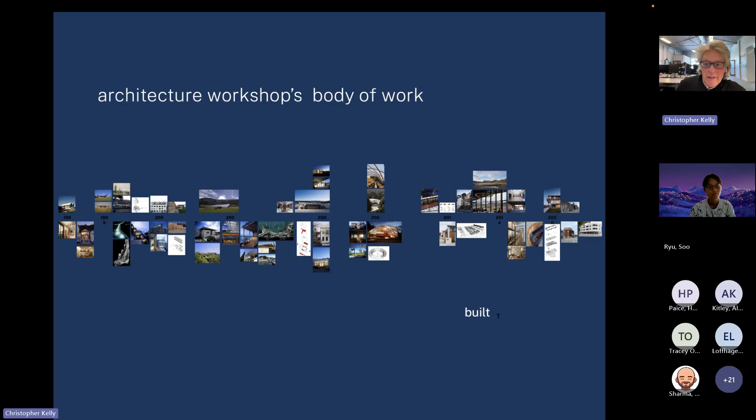I wanted to start by explaining some architecture workshop background. Here is our built and unbuilt work over the last 30 years, a timeline that we make. You don't get to build everything. If you get to build half of what you design, it's pretty exciting.

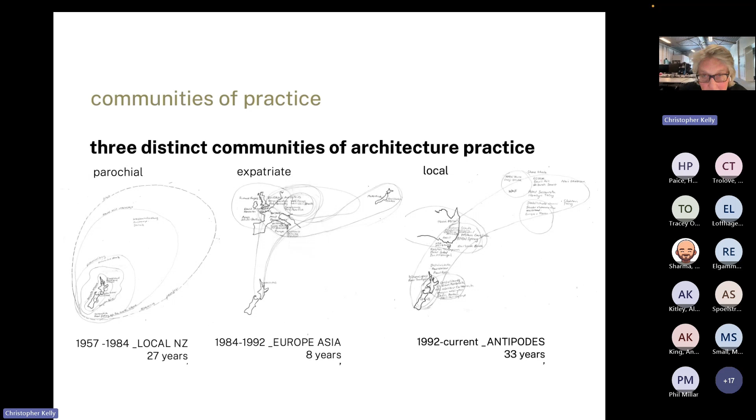I'm doing a PhD here in Melbourne, and part of that asks you to talk about your communities of practice. Up until '84, I was based only in New Zealand, so we were always looking out from New Zealand. Then I worked away for 8 years and had quite a different community of practice, with architects and landscape people all over the place. Then coming back to New Zealand in '92 to start architecture workshop, your community of practice expands. So I think it's good to think about what your own influences are and where you come from.

I was born on a farm on the East Coast, which you'll see.

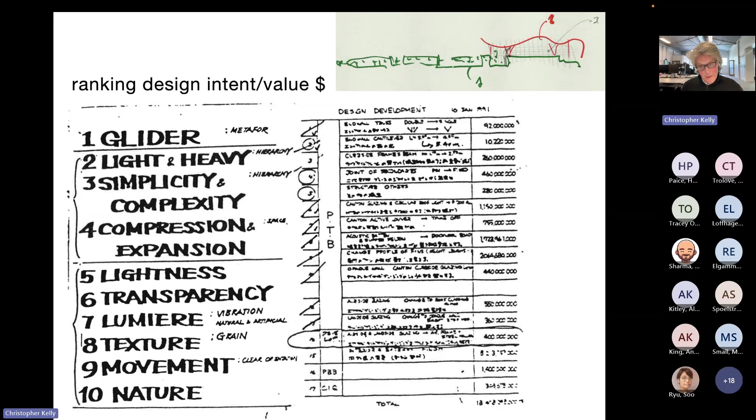When I was away, one of the most important things I learned was about ranking design intent, thinking about what the design intent was that we're making, and then using that to manage your budget by putting a hierarchy in your design intent. This is a project I worked on for a couple of years, and this is a little sketch by Renzo Piano - 1 is the ground, 2 is the roof, and 3 is the space between the roof and the ground. We were able to talk about the budget, and once we started losing budgetary items above item number 5, we were losing the design intent of the project, but we could address some issues below that. So you have to bit by bit try and distill what's important in your project.

You sort of use other people's ideas until you get your own ideas going. But I think that's fine - you just have to reference them and note them.

I think there's a thing in New Zealand that you become very aware of - the cultural cringe, and the idea that European culture here is quite fragile. It's Michael King. And then there's this cognitive bias, where everybody in New Zealand's got a lot of reckons, and you're never really asked to account for those. So I think it's quite important to acknowledge that, and acknowledge how you think about things now.

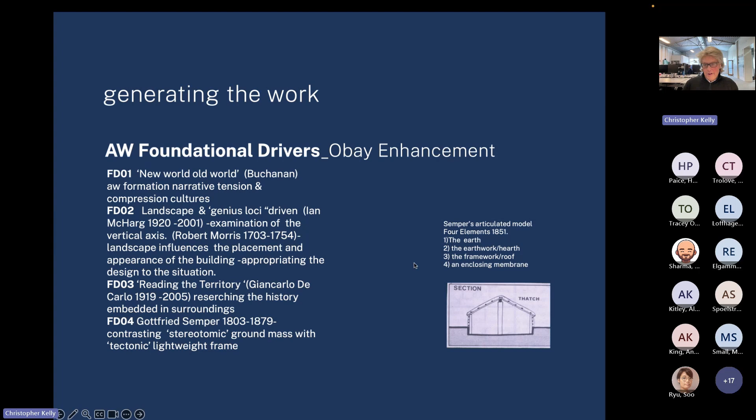That resonated with a German man called Semper, who had already thought a lot about the earth, the earthwork hearth, and the framework. We used those ideas to drive our projects when we first started.

There's general ones, which are readings brought back from overseas, and then local ones, which change every time you look carefully at the local project. I think there's just a list here which I made for myself, but as we go through I'll try to explain a few more of these.

I think that idea of land and how you engage with the surface is quite important. You lift the land up and you've got something like the Sydney Opera House base, a platform - it's flat, it's on grade. Or you dig in, more of a trench, or you can be completely buried. So there are only four conditions, and we always test our projects against those when we're starting.

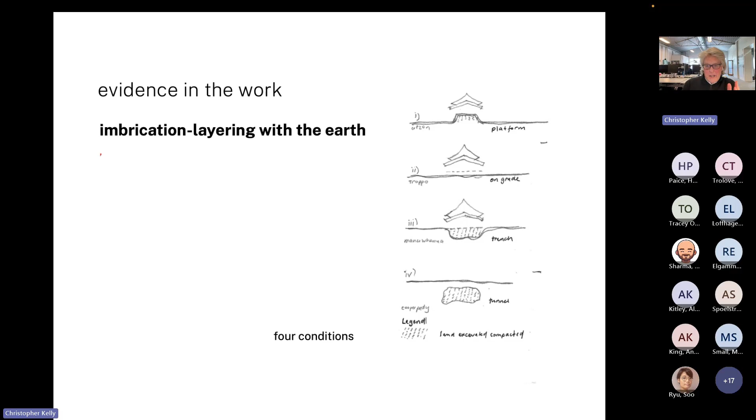We're always interested in the layering with the earth. So if you look at New Zealand as the world's 8th largest continent...

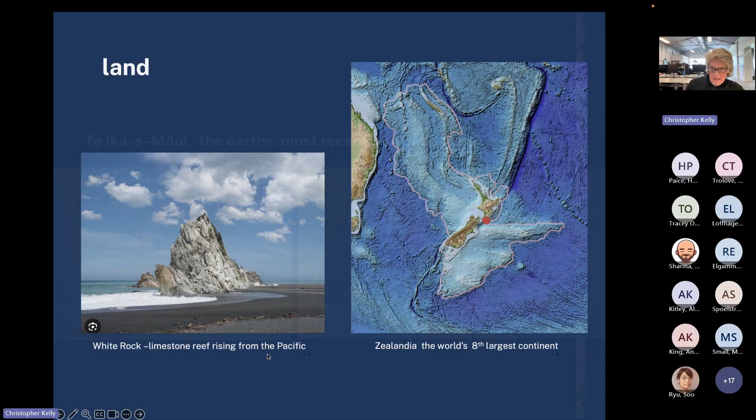It's a recent discovery, from bore logs by the JOIDES Resolution, a ship that made bores in those star positions. They found that the continent is about 1 or 2 kilometers below the sea, and that one side is completely geologically different from the other side.

The North Island is the world's most recently formed land - only 90 million years old - while the South Island is 180 million years old. So the legend of Māui is actually based on fact.

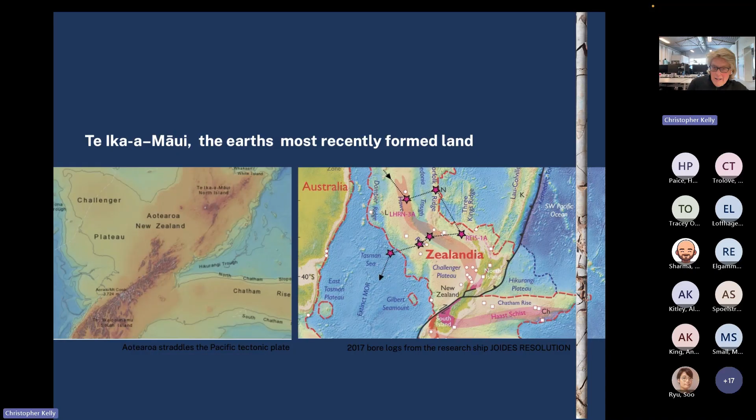I think it's very interesting to wonder how observant the first peoples in New Zealand must have been to have realised that.

Starting to look at our site, Te Whanganui-a-Tara, the view from the south and the view from the north, we always think back to this guy called Robert Morris in the 18th century. He always thought architecture and landscape were the same thing. We agree with him about that, and he pushed it a bit further.

He thought the site was an external source for architectural order, and that the architecture should be subservient to the landscape. I think we also agree with that.

When Wellington was settled, it was first settled on the north end of the harbour by the Lower Hutt, Petone, and there was a huge southerly. They decided that was not the ideal place for a city, so they abandoned all the sites they'd already sold in London.

This is the Wakefield Settlement Company, and they laid out the city at the other sheltered end of the site, the amphitheatre end. Because there wasn't enough space for much public squares and those sorts of things - remember they'd already sold all these sections and people were arriving wanting to find where their section was - the ridgelines became parkland.

There's very interesting and specific things about Wellington that have only developed where Wellington is. We're fascinated by those sorts of things, and we're quite interested in this Giancarlo person who talks about understanding the heritage and the history.

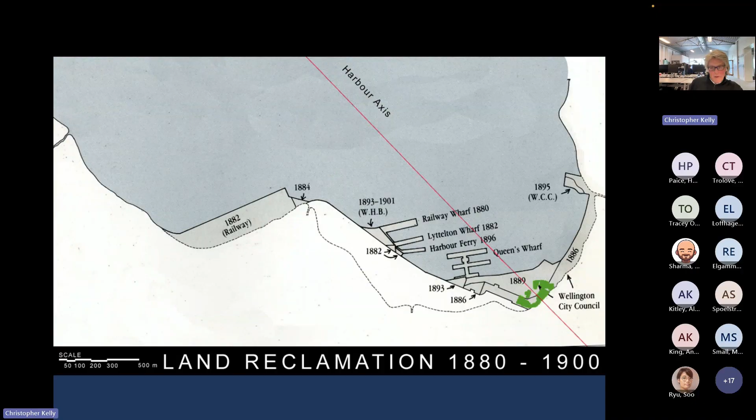This is the Geoff Park quote. I think you've already talked about that specialness where the land meets the sea, and how it changes - the difference between high tide and low tide. It's a very interesting landscape.

Our brief was to try and maintain the sand there, try and make the beaches more habitable, less rocky, and we thought about these different precedents as we started our thinking. These didn't start straight away - they developed in discussion over the year or so that we were designing it, getting it costed and recosted, and working with Isthmus Group developing the coastal structures that hold the sand in place. So this is what it was like when we started.

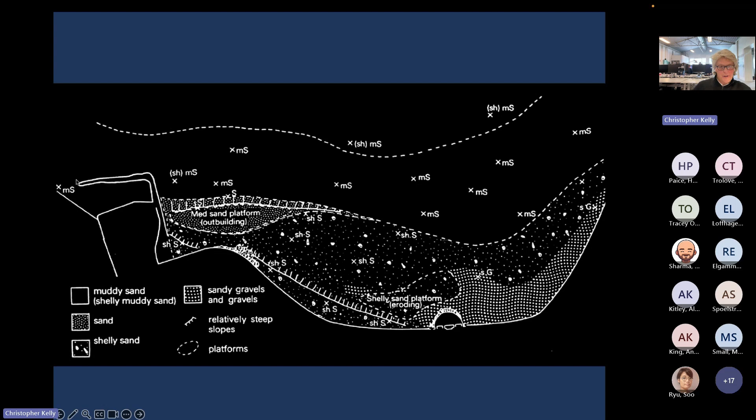So the geology of the foreshore there, you can see the band rotunda in the middle. Basically the drift is from the right of this image to the left. You can see the old tugboat seawall there. But actually what drives the sand the most is the wind direction and the wave direction.

So these beaches would take these forms just by the nature of the direction of the wind. So we made this decision quite early on. We noticed that it's never going to be Bondi in Wellington - it's a walking promenade beach, and that's the most important consideration, to think about its existing use.

Because what we inherited at the start were two Ministry of Works diagrams. One was a big man-made promontory on the left here, and you can see some other promontories that stick out. We thought all of these were trying to make one big beach, and by making the big beach we were making very big intrusions into the natural landscape.

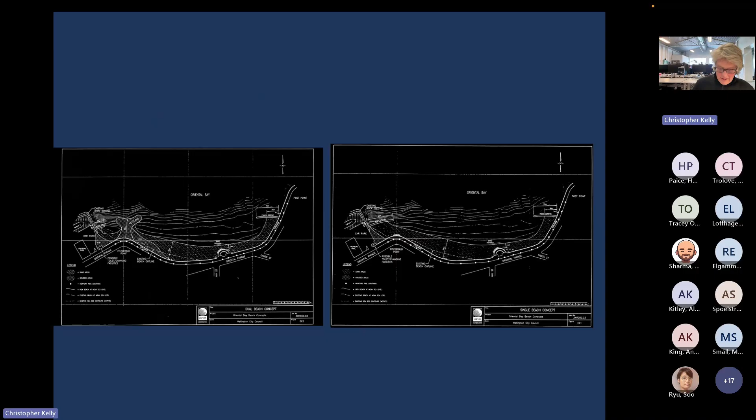So we said, well, why not make three little beaches, because that's more the pattern of Wellington Harbour. We looked at the old photos. We looked at the sea bars that were gathered around the edge here on the right. You can see how stony the beach was in 1932.

There was always the problem of traffic and extra parking, so we talked about ideas of lightweight Japanese car structures where you could get twice as many cars, say, around the Freyberg area.

We looked at the low tide, we looked at these lines, and we were pretty keen to take away these lozenge areas at the bottom of the Norfolk Pines. And you can see, if you look back at this picture on the promenade, that we kept these areas flat.

We tried to use the limestone as a reflective surface, so we put downlights up in the trees. We just got rid of clutter - got rid of signs, got rid of lights on the side, and we tried to leave it as unencumbered as possible. So that was a big driver in the design process.

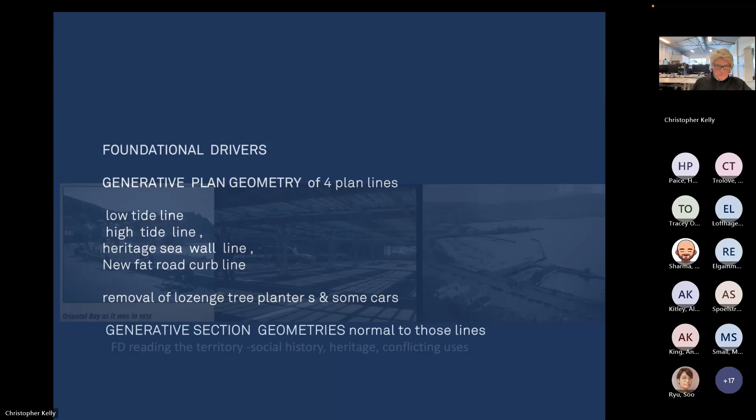So these are our lines - if you look at the curb line, low tide and the high tide - and I'll just go through the main elements here.

So the beach control point, you get a bunch of rocks on 8 and 9, which are just below the surface. We wanted to try and keep those covered at high tide, and try and see would they still do their job if they were only exposed at low tide.

I think there's some testing done by Richard Reinen-Hamill at Tonkin and Taylor - he was extremely good to work with. But we did have to have at 8 and 9 some rocks that did stick out, so we said, well, let's just make them like a promontory so they're sort of natural.

But the key thing at number 9 was that there had to be a big infrastructure that held the beach and held the currents and got the sand deposited around number 7, and then they could take it back to number 7 at the west end. I don't know if you can see my pointer or not.

There were other things where we had stormwater, and we were conscious that you look down into the water from up above, from Roseneath and walking around the harbour. So a big underwater stormwater outlet would stick out. We encouraged them to make a tutu around the base of the rotunda and just discharge the water out through slots in the edge, and then we could walk across the top of that.

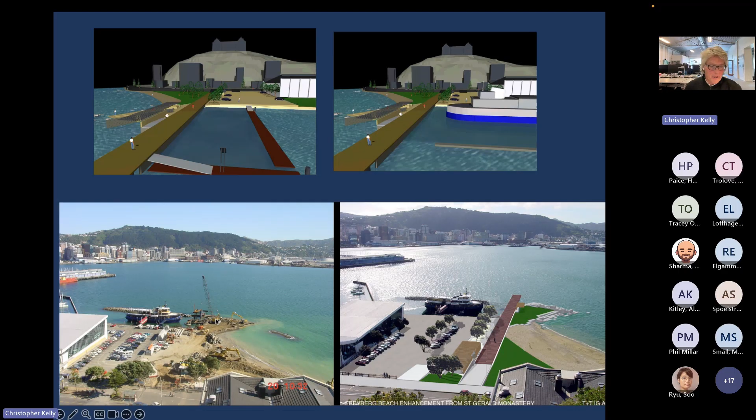And you can see on the lower left, the sand starting to arrive and them consolidating the control point, the main control point, out at the south end of the beach.

So there's some lovely diagrams here by Isthmus using this tatami mat idea, which is just precast planks, which you're able to build up and think about access down. A wheelchair at low tide could come down one of these ramps. So we integrated a lot of things in quite a sort of random-looking collection of precast.

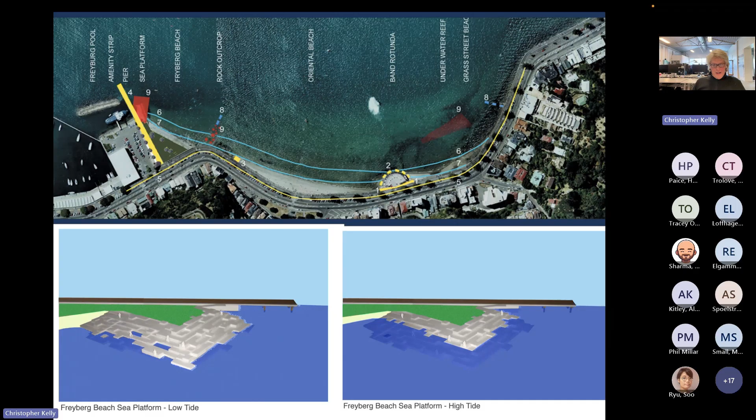And then how it changed between low tide and high tide, we thought was pretty fascinating. So the urban design really meant collating all of these sections, all of these ideas, together and drawing the land, and then drawing the additions to the land on top of that, putting them next to the scale of the Freyberg pool, and just composing these sections, if you like.

You can see here the tatami mats looking back. Sorry about the hairy photo, but you can just see the amenities block taking shape there, and the sort of dominant shape of the Freyberg.

We wanted to be in the foreground of the Freyberg. We thought about whether people sat still or moved along, or where they laid down, or where they watched other people. We're always thinking about how people might use each of these bits of infrastructure. You see here, you can even get sheltered from certain winds if you sit on the tatami mat sculpture at the end.

These are some early studies about how the grass beach would work and how we would integrate the amenities block down, how it sort of sat in front of the Freyberg. We think the Freyberg is a very significant building in Wellington, so we didn't want to wreck its forecourt, if you like.

The other thing about the wharf is that you're looking back at the St. Gerald's Monastery behind. We're sort of almost on the axis of that, so we thought about that when we were setting up the boardwalk axis.

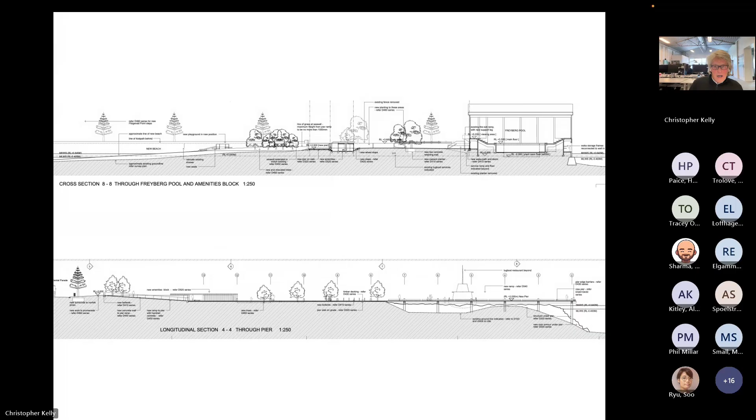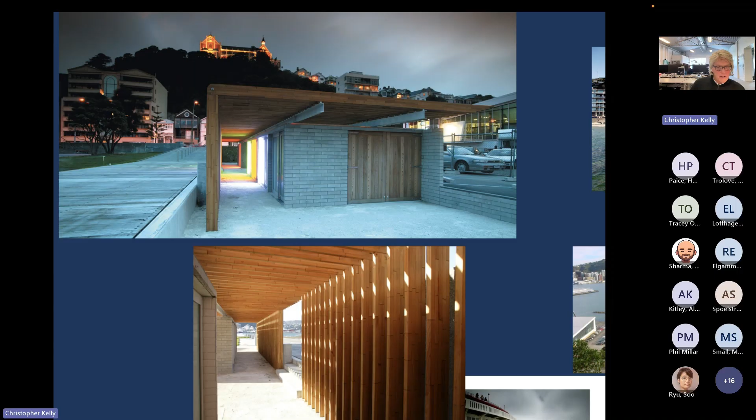More sections arranging that. You can see the carapace starting to fold over the concrete amenities block, how we've dug it in so it sits down low so it doesn't dominate you when you're walking down the plank.

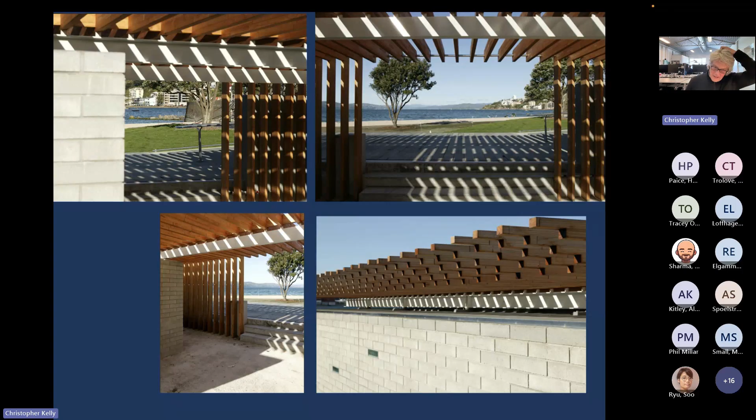We tried to make the loos all the same, sort of universal, give them a different colour and a different light. This is pre-LED. Just get some repetition with the structure. Wrap the glulam over the top.

So these sections we're going to show you, just sections at right angles to the main street as you come round by the rotunda.

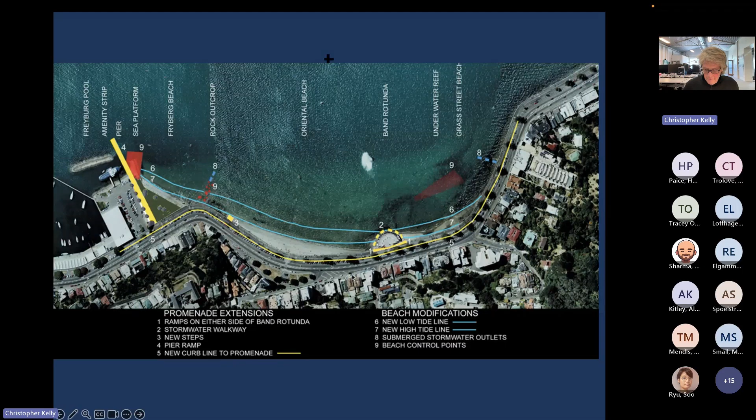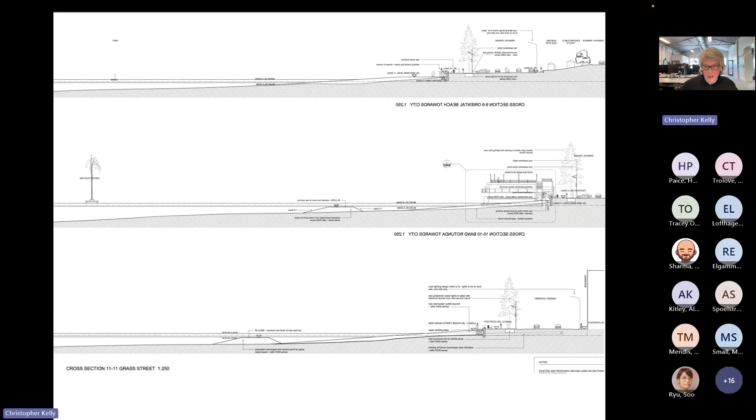So you can see the height of the additions to control the waves, and you can see the old seawall in here on the right. You can see the new ramps coming down, the new stairs. You can see the new ramps by the rotunda, and sorry, it keeps going backwards. And just trying to get our high tide, low tide, and our beach areas all worked out.

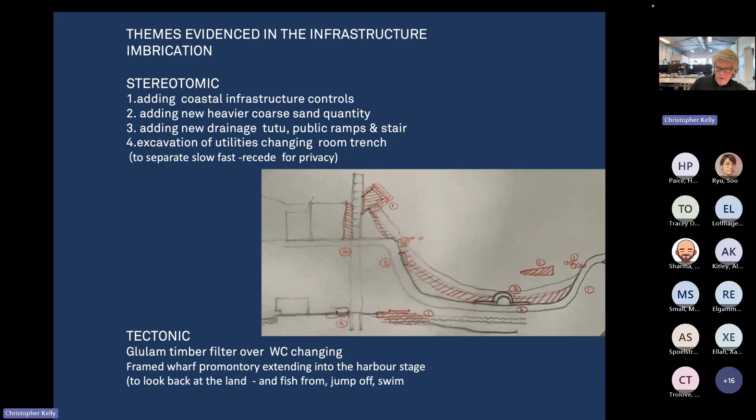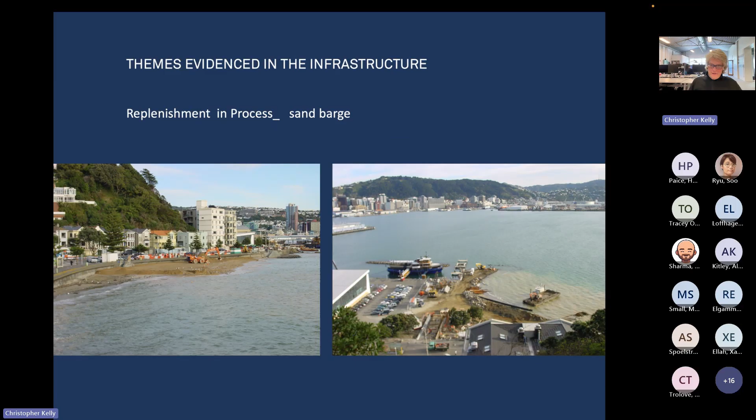Here you can see the sand arriving. It's heavier sand, so it doesn't move in the wind, and it should keep the beach form for as long as possible, just because it's a grainier sand, so it's not so comfortable to walk on. But that's the decisions that we made.

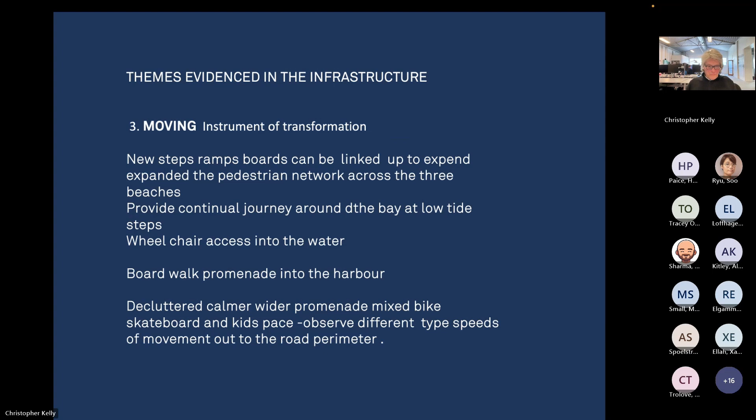If you're moving, how do you move around it? Different areas. How do you get disabled or infirm people down to the water? So we used the tatami mat as the main area. These were all the design intents that we came up with as we were going along. The access to the beach, the route around the band rotunda.

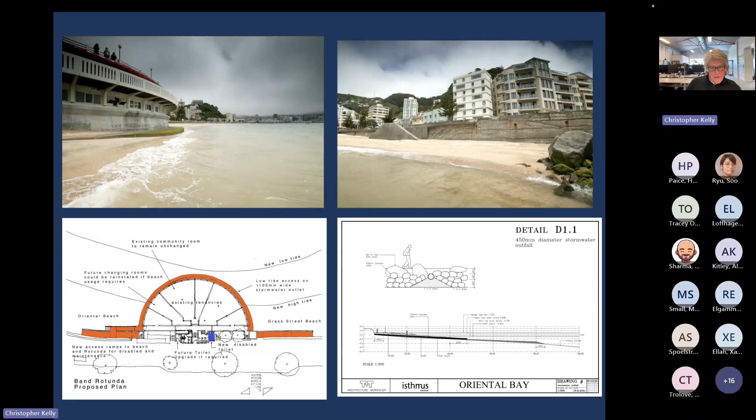We tried to just mimic the old stairs that were there. We didn't—we like the idea that when you design something, you can't tell what's been designed, and if you notice it, then you haven't done that good a job. So we like that idea.

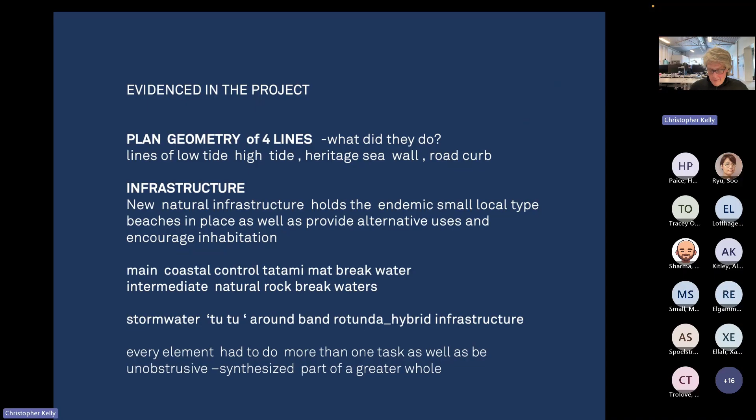Okay, so then we have this other thing we're asked to do with our project. This presentation is one of our presentations we had to make for the PhD. So we're talking about, you can have all the ideas in the world, but is it evidenced in the project? What is actually built, and what does the project say when you're not standing next to it, giving you a narrative about how you came up with the ideas for it? I mean, that's fleeting. What's left will say different things to different people. So it's quite interesting to think about that as you are designing.

We received some nice citations for the collaboration. I think Helen Clark picked this out as Building of the Year in 2006 in the National Environment Year. So we were pleased about that—all the thinking had borne fruition.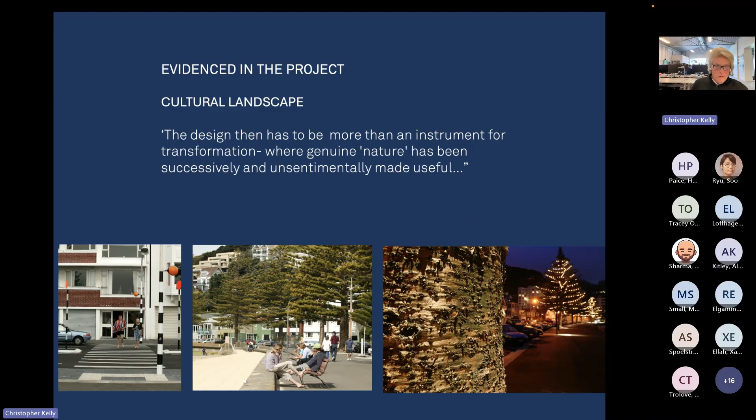We tried to make the pedestrian crossings go away, so we didn't have a whole lot of flashing signs and bits and pieces, and we set the seats out so you could sit both ways. Some are close, some are further apart, so you can eat your fish and chips there with a big group or a small group.

I think this—if someone thinks that it's worthy enough to have the wedding photos taken, we thought that was a bit of an accolade. So just to finish then, if you look back at our work and the heavyweight or stereotomic things, the projects that support that, this is obviously one of them.

But there's other projects where we live in the lightweight part of the project, versus others. And so we've looked at all our work and we've compared it to these different ways where you can live in the heavyweight part, live in the lightweight part, or live between the heavyweight and the lightweight part. So just understanding the result of how you start thinking about a project, I think is important. That's the end of my chat.

So I can refer, should I share screen back, or how should we do it? Yeah, let's stay on the screen, that's fine, because some people might ask questions about a certain slide or something like that. So okay, sure, cool.

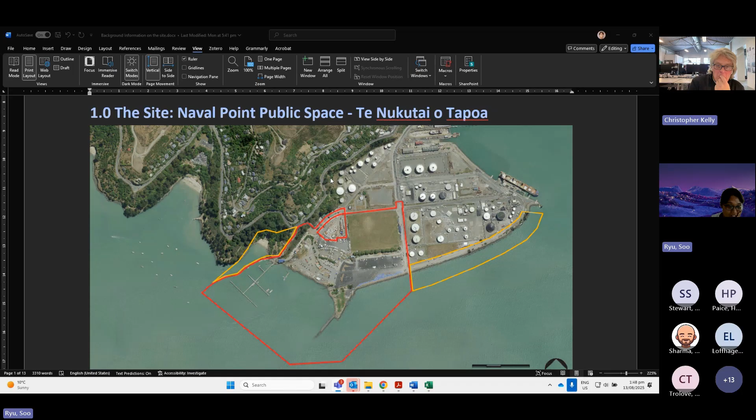So this was an old tank farm, is it, that you're trying... so this is Lyttelton Harbour out that way, and this is a small marina. There's lifeguards, a lot of water-based sports happen here. There's a rugby field being refurbished at the moment, but it's enveloped. The red is the council land.

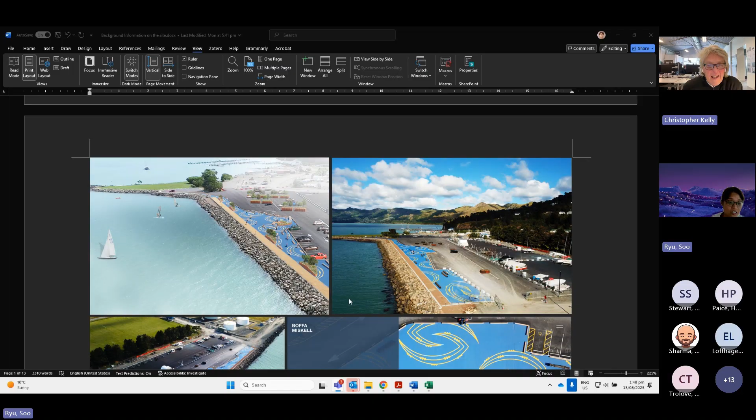And then they basically got landscape architects to develop this area because they were hosting the SailGP, and this became this area. I see. And this has been built, but they weren't allowed to do any reclamation or engage with the water in any way, so the brief was restricted.

So we're looking at, okay, what if we didn't have that restriction? What if we could engage with water? And what if we were designing also from a non-human perspective, as habitats? What would that then look like? So that's kind of the brief we're working on.

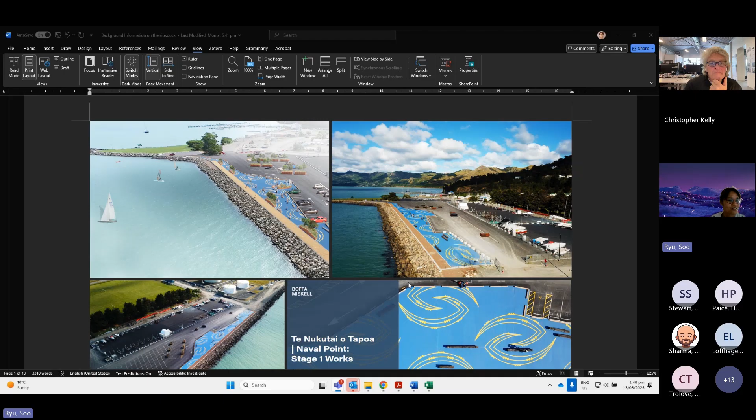Yes, I think it'd be very interesting to map what it was like before all that reclamation took place, and just to see the years and stages of that. So we have all that information - the students have done a really great job looking into the history, understanding the context, like you said.

And we were also working from a watershed scale, so we're working from a multi-scalar perspective. Even though we have this site, as landscape architects we understand that when you're working with ecology and water, the site becomes multi-scalar and connected - what's happening on land impacts what's happening in the sea and vice versa. So they're working from a watershed scale to the naval point site scale, engaging with the water and the non-human life forms that live there.

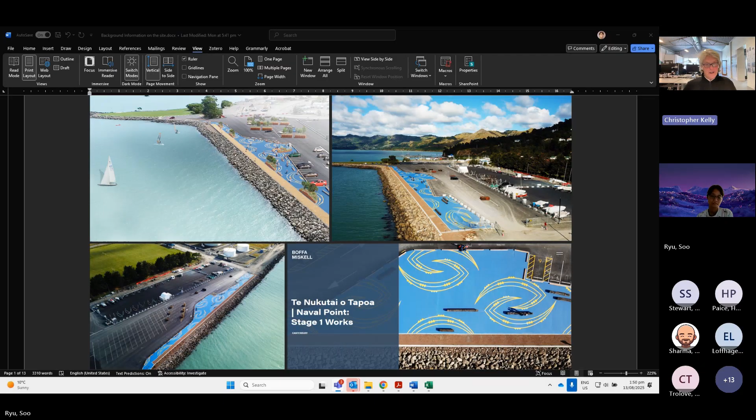So I guess it's just looking at the pattern of beaches around Lyttelton Harbour, because it was almost going to be a very big beach in Oriental Bay until we campaigned pretty hard about replicating the small, narrow, rocky strip beaches that were there.

So that might be a lead - you could cut down the car park bulk into 3 or 4 smaller ones and develop some landscape themes related to those areas historically, or you could try to find some coat pegs to hang a narrative on.

I'd be looking at smaller parts of it, or some part you might want to go to yourself, or how a different user might engage with it - someone who liked going into the water, someone who didn't, someone who liked walking, someone young, someone old - all of those things. I'm sure you're doing all of that, but it's quite a hard job you've got there.

So they have to pick a human client - it could be school children, or people with disability, with access needs. I think the ramp idea you guys did was great, so it's not just for people who have mobility issues, but people who don't usually have mobility to have access to the water. I think that's a really key thing.

And then they have to choose a flora and a fauna that is in the intertidal zone, so they're designing for humans and non-humans.

I think a big thing here, perhaps you've done it, is the bathymetry, the wind direction and the waves - how the waves naturally form up, and how they've been forced into doing different things they perhaps wouldn't naturally do. I see you've got a big breakwater there.